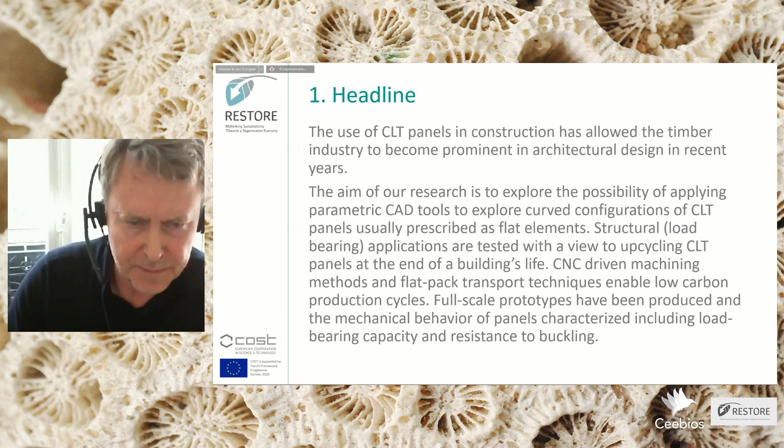CLT - I'm going to go straight to why we chose the CLT. CLT is becoming now the go-to product when we start building office buildings, housing. It's a great floor slab substitute for a concrete floor slab. So cross-laminated timber, these are big chunks of timber.

This is a project, a competition which we won, I think, in 2012, and which we handed over in 2017. It's in the Porte d'Ivry, if you know this part of Paris. A very visible site, but also a site which suffers quite a lot from noise pollution and all of the problems that come with being next to the périphérique.

When we initially designed this building, we were told by the environmental consultants, Franck Boutté, that at the end of the building's life, we were expected to burn the timber and recuperate the calories. Now, this seemed to us absolutely nonsensical, but that's what the calculation was asking us to do. That's what they expected buildings, when they arrive at the end of their life, to happen - to be burnt and used in a different way.

We thought, this is crazy. There has to be a way to recycle the timber elements, and particularly the floor slabs, at the end of the building's life, and to do something valuable with them so that we keep that carbon sequestered and that we don't have to burn it. So we started thinking hard about what we could do with the timber. And this really became the source of the inspiration for the research project.

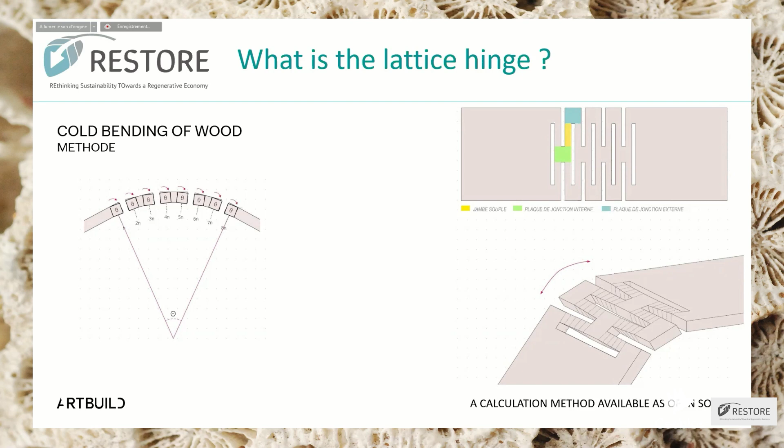So we had a look at the algorithms and parametric tools that were available, and we understood that certain calculations had to be made depending on the species of wood and the thickness. This is all about how you put certain elements of the timber into torsion. So we got our engineers on board and started looking at that a bit harder.

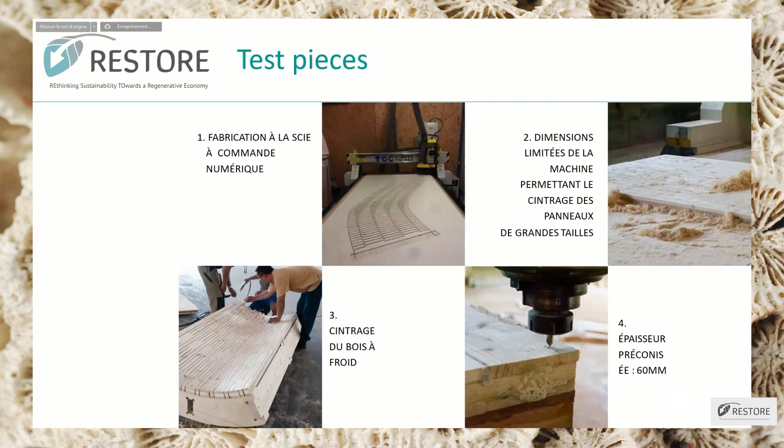We then started to look at what tools were available, whether it's circular saws or fraiseuses. Lots of different things available, different sizes of machines, different sizes of robots, which could enable this transformation to occur. So we started to do a little bit of experimenting.

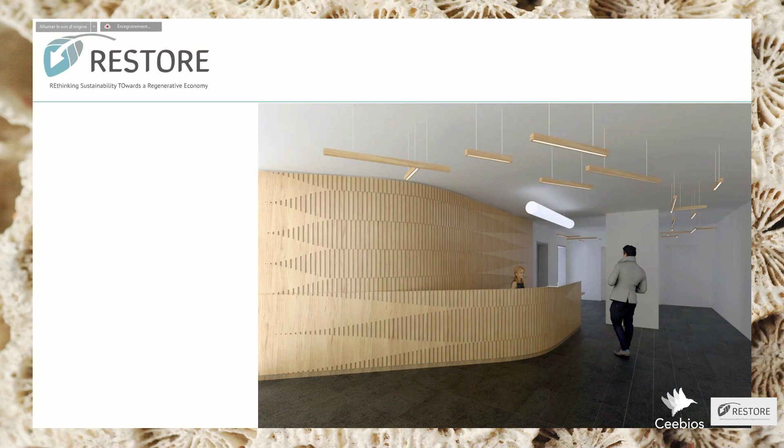And the first result of the experiment was actually the hall of the building which you just saw, handed over in 2017. This was an application which was very modest, just a decorative application, but it gave us a pretty good insight into what tools we would need, and when upscaling towards timber slabs, what we would need to do to get a feasibility study done and move one step forward.

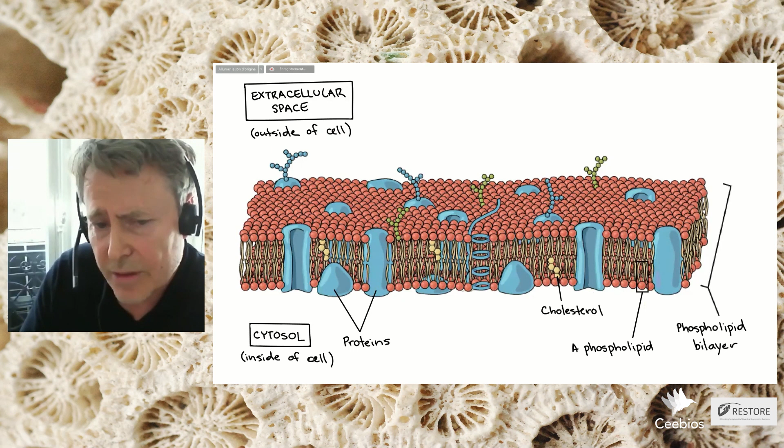At this point, there was a bio-inspiration moment. I don't know if any of you recognize this diagram, but it's the double membrane, the bilipid membrane, which forms the architecture of all cell walls in the biological world. It's a phenomenal structure, a phenomenal principle on its own, but I'm not going to go into it.

But it did make us think a little bit about when we recycle our timber slabs and start making these new structural elements, could we not think of a double wall rather than a simple wall? Generally speaking, structural walls tend to be one element which does all the work. Could we not be more efficient with the use of matter and divide that material into two, creating a cavity?

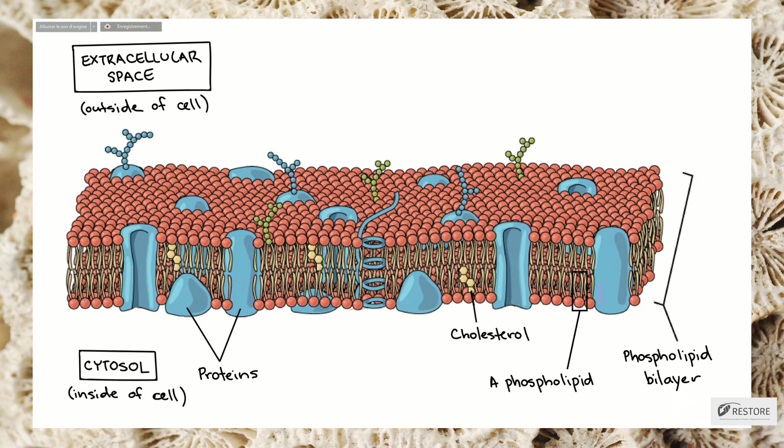Into that cavity, we can put all sorts of things. We can pierce the double membrane with our windows and different things we need to get from the inside to the outside. Could we not develop a double membrane system out of our timber slabs? And that's what we started to do.

The first concept models, you can see here that the cuts made into the vertical slabs of timber correspond to the ability to curve it. So if we have cuts like that, we end up with an object which looks a little bit like that.

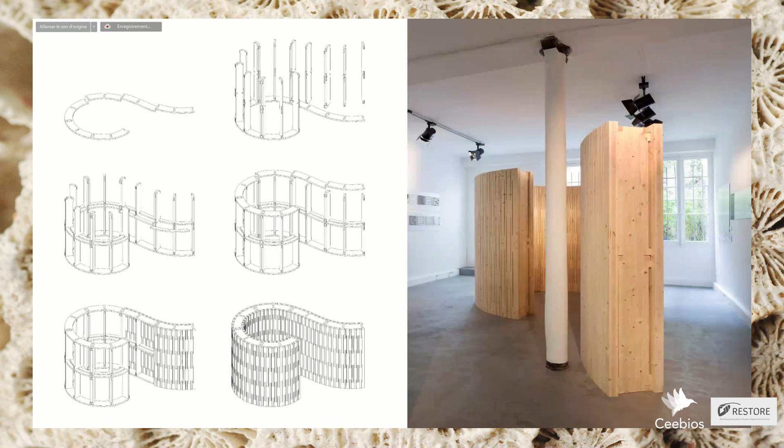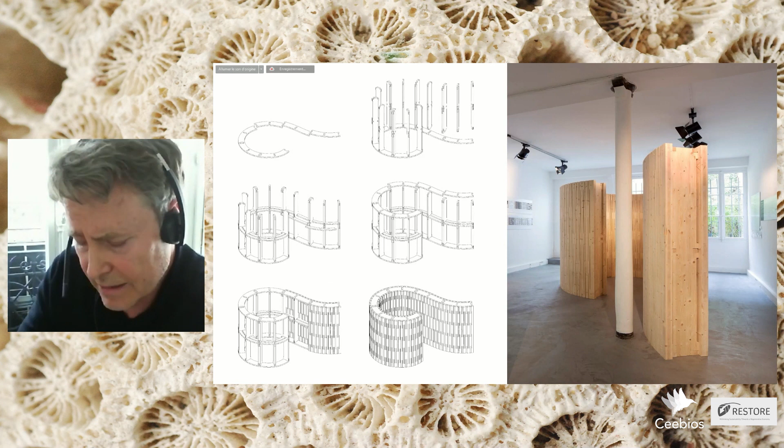So these are 6 centimeter CLT slabs. This is about the thickest that we could go to in terms of the current standard machining tools, standard practices for CNC. And we were pretty happy with that. We actually had on our hands a real structural concept.

And the double wall was also very attractive because we thought, well, yes, we can run all sorts of the nitty-gritty bits of architecture, the vertical stacking, the tubes and pipes, the insulation, acoustic insulation. We could stick it all in there and get something which could become a really viable and sculpturally interesting principle for future buildings, for the third life of the tree, if you like.

So just a quick reminder of when we started benchmarking this process, the positive aspects that we were looking at. So first of all, a reversible bending process. We're transporting our timber slabs flat, and then we bend them in situ.

Of course, this is a cold process because we're just using machines to transform the timber. We're not using heat presses and conventional bending mechanisms, big jigs, which are not particularly good and sometimes very, very expensive from a carbon point of view.

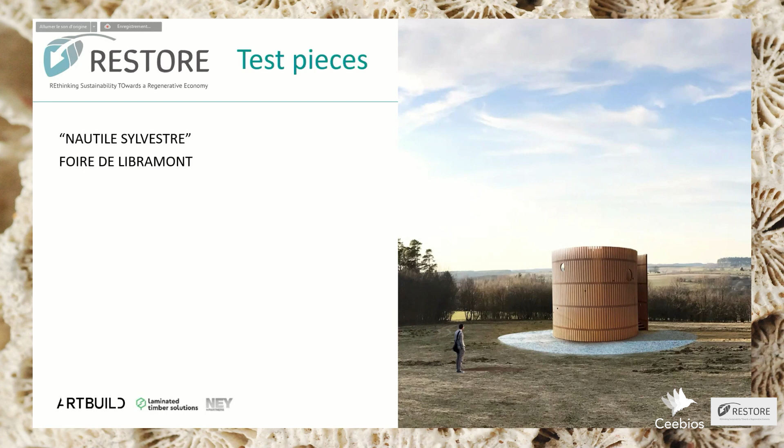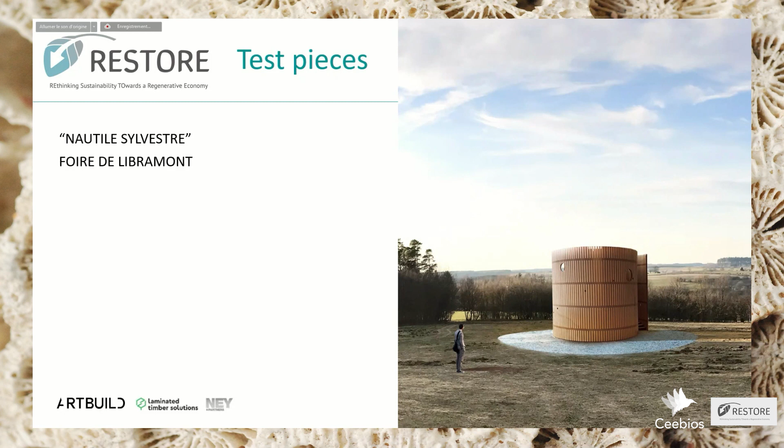This pavilion would then have to welcome the public, which introduces a number of new rules you have to respect. And I think if there are any architects listening, you'll understand the constraints involved with having to validate your structure in order to have a certain number of people come and visit the building.

So another biomimetic moment—we started to think, what curved structures are there in nature which could offer us a solution for this particular pavilion? We looked at bone. Bone is very heavy, it takes a long, long time to grow. Concentric circles—lovely stuff, but very, very matter intensive.

When I was a kid growing up in Jamaica, I remember hurricanes coming through the island and knocking down all of the banana trees, banana plantations, which would then spring up again. A year later we had plantations of bananas, and I always wondered how does that happen—how can the banana tree, it's not really a tree, how can these stems grow so fast?

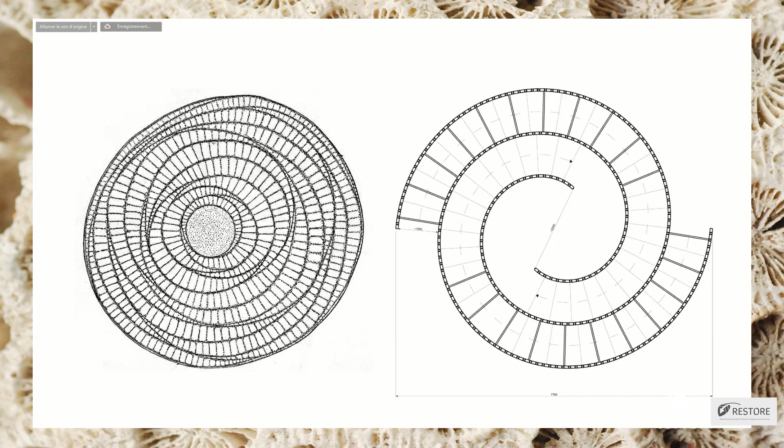We designed a structure based on that, where we used the stair treads to replace the lateral bracing. This gave rise to our first model, done with a small CNC machine, which enabled us to get the parametric tools more or less sorted out.

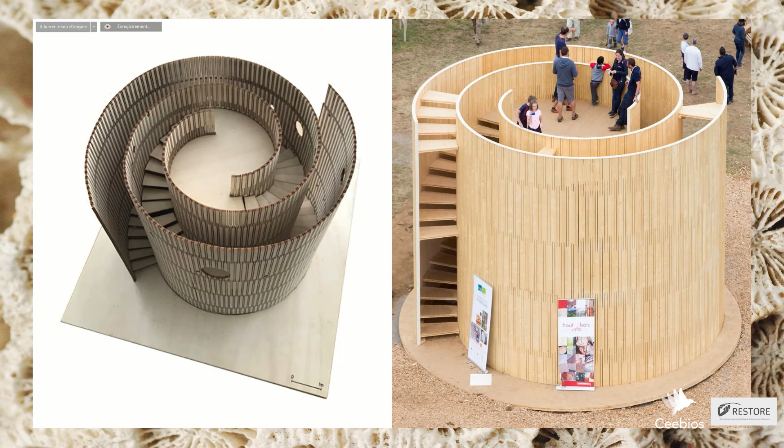And then the pavilion, which was built in 2019 for the summer of 2019. That gives you an idea of how you can take the principle and work it up—obviously I'm going through a very accelerated path—work it up to something which becomes an architectural element.

You may wonder why we cut it off absolutely flat at the top. Well, this is because the idea is that this is a section of a structural element which could be asked to do something much bigger than that.

We also discovered, going through this process, what a beautiful aesthetic piece this procedure, this subtractive procedure, can offer us. So in a way the architectural sensation comes back into the process quite a bit later, after you've gone through all of the technical and intellectual hurdles to get this stuff built. The architecture comes back to work all of its magic on you.

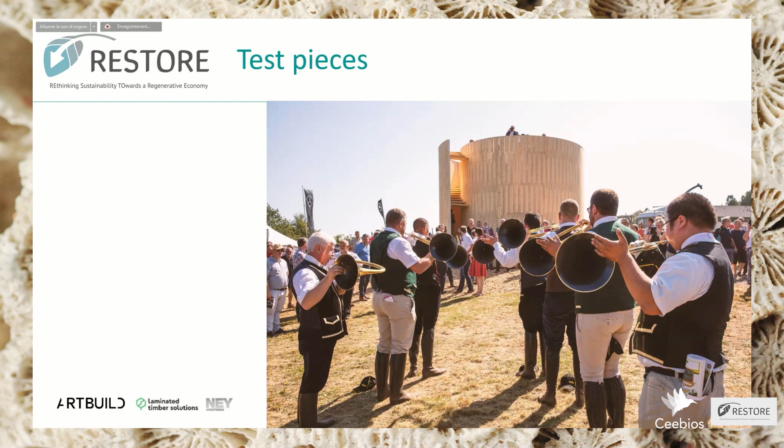And there is the structure working its magic on our Belgian friends.

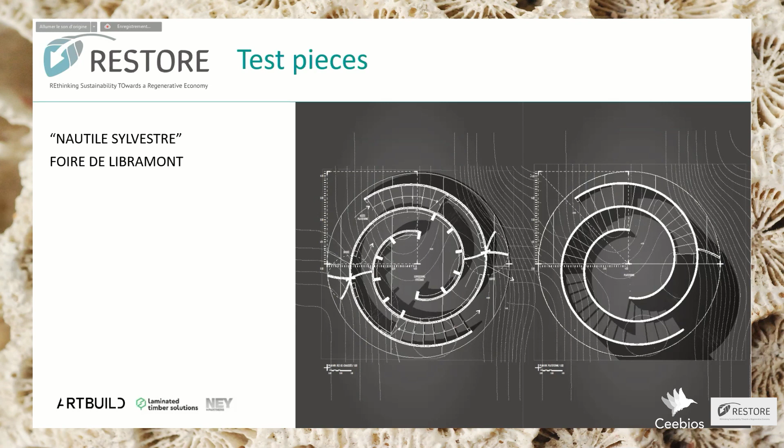The work we're doing now on this particular structural principle is benchmarking. If we wanted to do exactly the same thing with a conventional post and beam structure or a stud frame, what would the carbon imprint be? How much time would it take? What would be the options available to us in terms of the choice of timber, etc.

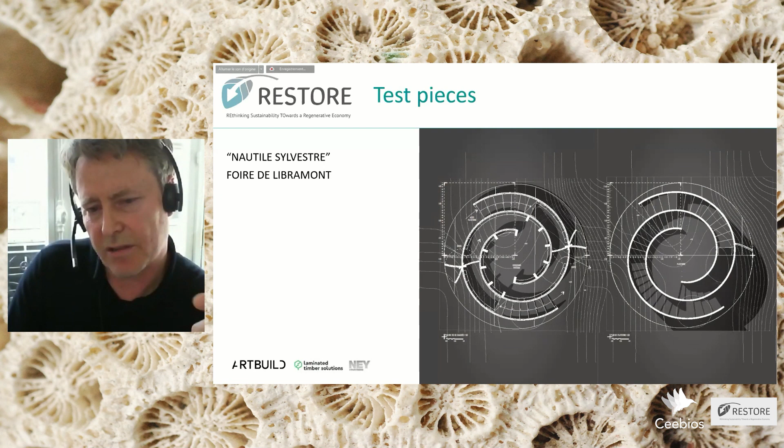So benchmarking is also a very important process in terms of design, to find out whether or not you're heading in the right direction. But of course this is recycled timber, so already you're starting from a very beneficial carbon footprint by not having to go out and cut down trees again.

And then the third and final project, which is the most recent manifestation of this research, the Grand Palais Éphémère. So this is this summer—it's being built right now. It's Wilmotte who has designed it. It's a huge timber structure. It's magnificent.

If you ever go down the Champ de Mars and you get a chance to have a look in, it's absolutely wonderful. This will then open to the public late spring.

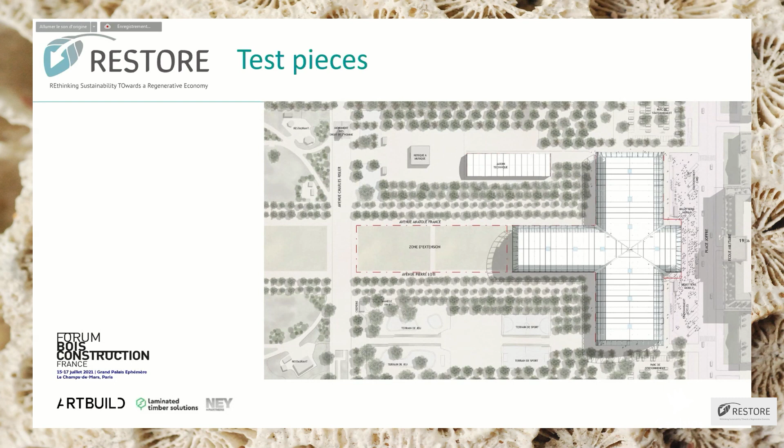We were asked to design the temporary amphitheater on the inside of the building for the Forum Bois Construction, which is an event held usually annually, a big meetup for timber actors across Europe and even some from around the world. The request was to design the theater, right in the middle of this.

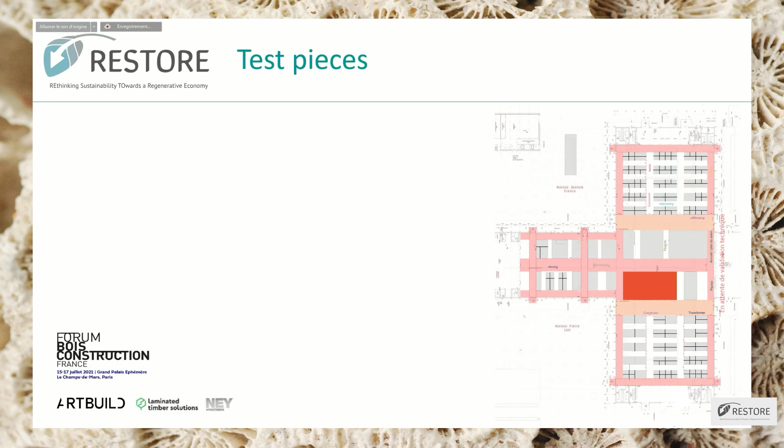The middle of the Grand Palais Éphémère, and the red rectangle gives you an idea of where it's going to be. We went straight to our timber bending process and thought about what we could do with our panels to create an enclosure as the basis of this theater. The theater primarily exists to protect a certain area, to give a certain level of intimacy for the speakers and for the different conferences held in the Grand Palais Éphémère.

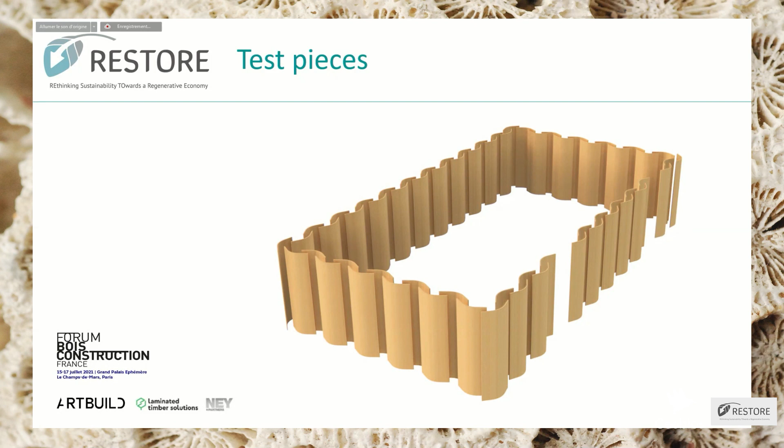So we came up with this idea of a sort of timber rigid curtain, which is going to surround the 300 or so seated places and the stage. The question was then, how do we get all these things to stand up and work together as one simple structure? That's a view of the inside.

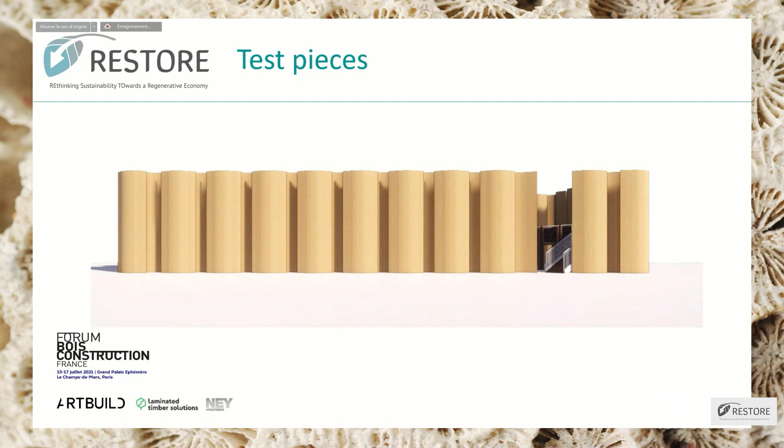Quick view of the outside. It's about just over 5 meters tall, so these are very, very big panels. Again, 6 centimeter CLT. The inspiration for the structure came this time from bird bones.

Bird bones are also phenomenal in terms of the efficiency of matter compared to the rigidity which they supply. That seems kind of obvious when you think that a bird is not going to fly very well if its bones are too heavy, but these are marvelous structures when you have a look at the inside.

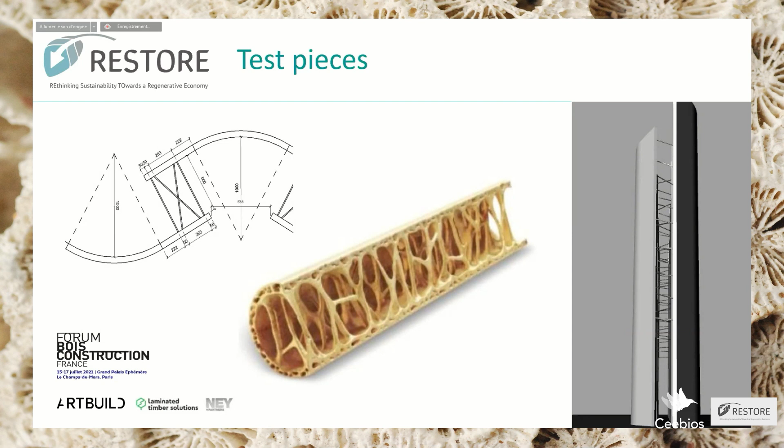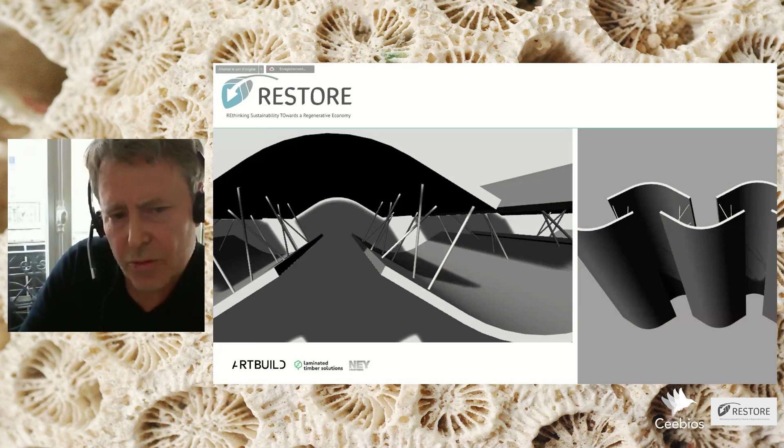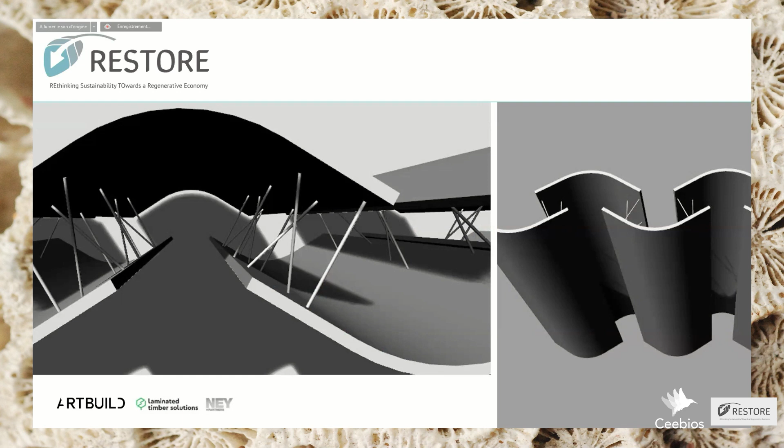So we thought, perhaps we can use this elegance of the cross bracing in order to hold the timber pieces and make all of the individually stood up timber pieces work together as one sort of exoskeleton. That's what we asked the engineers to do, and that's pretty much what's going to happen as we go through the process of refining the design for the building's erection this spring and summer.

And on all of this, testing has to be done before you put the wood into the machines in order to start cutting it up.

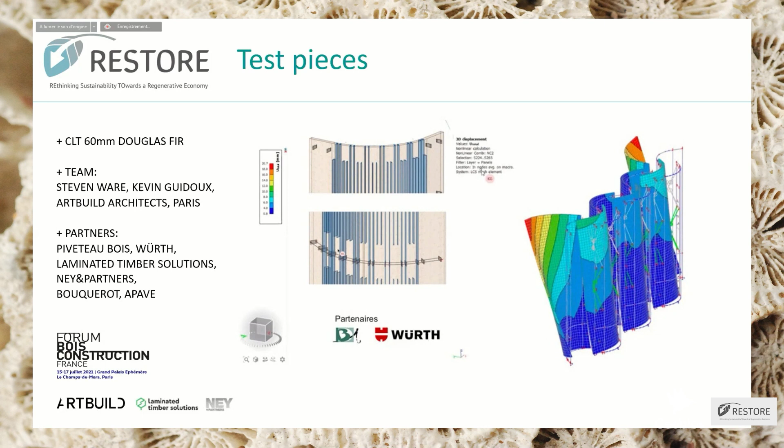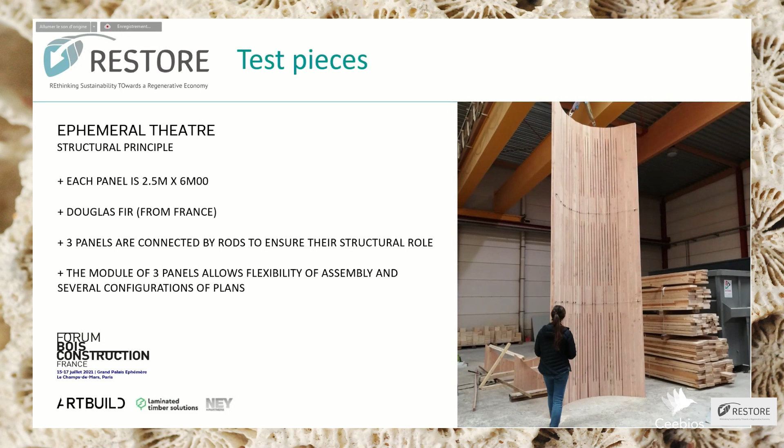And then that's what it's going to look like, hopefully, inside Wilmotte's Grand Palais Éphémère when the project is completed.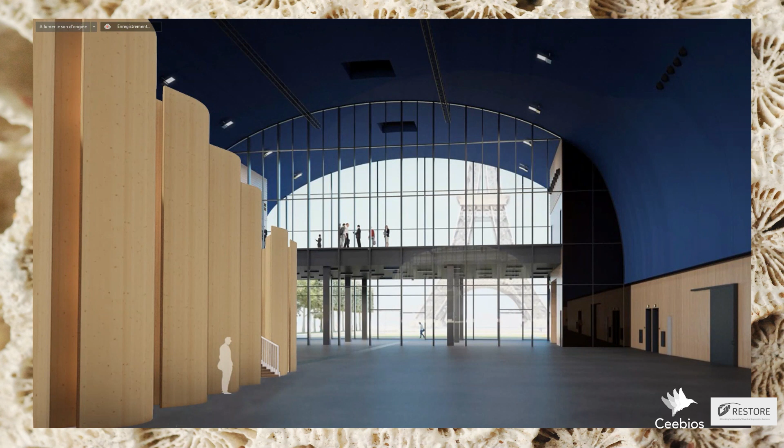COVID-19 permitting, it would be wonderful if for anybody listening who is available to come in late July to the Grand Palais Éphémère, to see not only our amphitheater, which is just one piece of the show, but to discover some of those other wonderful projects being built in France and around Europe at the moment.

We also dream a little bit. Obviously, we're architects, and I think we haven't lost track of utopia. This project, we're hoping that perhaps one day we can imagine structures which are not just one-dimensional curves, but two-dimensional curves.

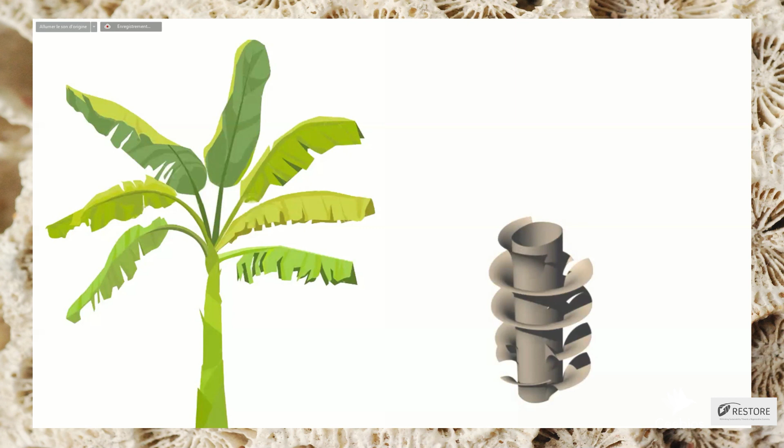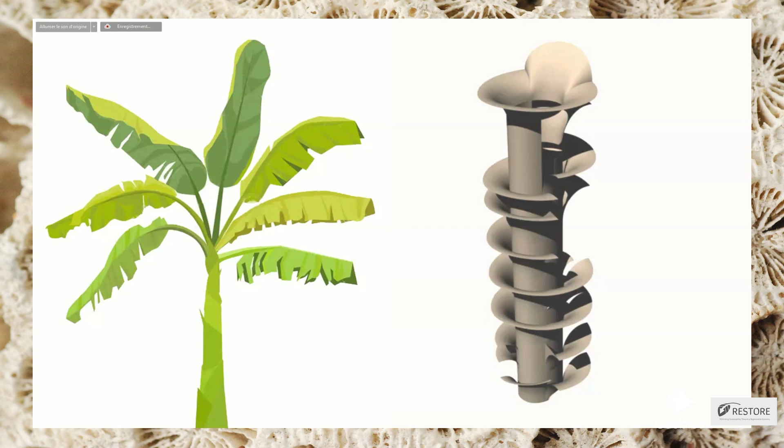So we're still looking at our old friend, the banana tree, and we're now working with engineers on the parametrics of trying to introduce a double curve into that bending mechanism, which opens up a number of different possibilities in terms of where architecture can go and what structure can offer our buildings.

And perhaps we can use the intelligence of our numerical tools. Perhaps we can get all of these things fitted together, and we can produce buildings and habitats which are quite different from anything that we see today.